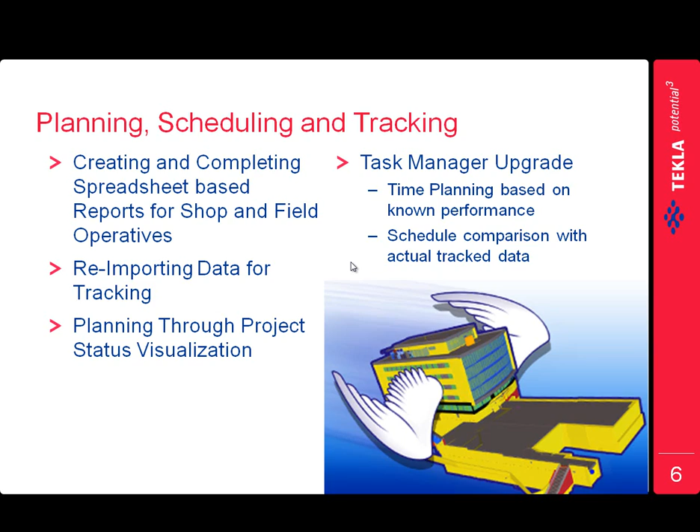So let's go ahead and dive right in. We'll go into the planning. So with the planning, I'm just going to go ahead and jump into the Tekla model. This is the same model that we've been using for all of the other episodes, if you will, of the Fabricator series. So what we did previously is we had it organized using the model organizer and things like that. So I'll go ahead and open up the model organizer just to take a look at some of the things that we did. We've done the cost coding and everything like that.

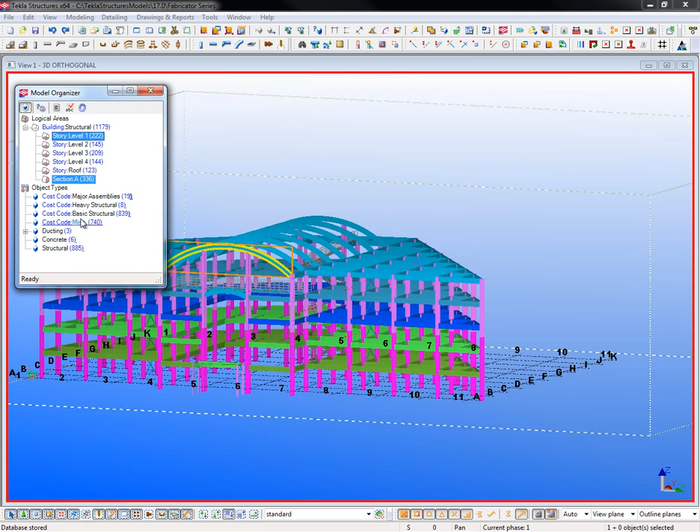So what I'll do is we want to plan some information basically about our phase 1. So what I can do is just click on this section A, which is how this is all broken down. If I click on control and select level 1, it'll filter all of that information out for me in a quick, rapid way.

So again, another advantage of using the model organizer as opposed to selection filters is that you can manipulate the information within this. And we could drill down even further if I wanted to just select the beams that were on level 1 in section A. So once I have that information selected, this is what we'll be working with.

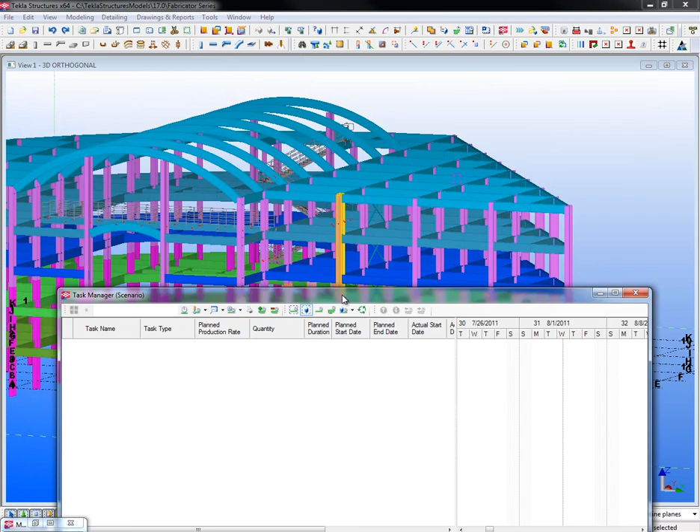So I'll go to Tools, down to Task Manager, and this will open up what is called the Task Manager. There's several buttons up here at the top which we'll go through and explain, but basically just general settings and similar features that are available in other Tekla tools. So the first thing that we'll do is just generate a task. And I can just call this the detailing task.

I'll go ahead and hit enter, and then under the detailing section, I can create a subtask for each of my phases. So I can do phase 1, phase 2, phase 3, etc., and then create another task for fabrication, and then subtasks broken down by phases, or however we want to have that broken down, and then for erection, or however you want to do that.

So what we have are different task types. But before I do that, I'll just go ahead and add information to this. So I'll just right click on this subtask, and I want to add the selected objects in the model to this. So I'll select add selected objects. And once I select pieces, I can then define a production rate. And this populates the quantity. So I have 86 pieces from the model that are going to be on that.

And based on this information, it gives me a planned duration, a planned start date, which is today, and obviously I can change that. And then based upon 2 pieces per hour, it's going to tell me that my planned end date is on August 10th. One other thing to notice there as well is that when Lee added the pieces to the task manager, the timeline in the Gantt chart actually grew as well. So you can see in a visual sense how long it's going to take to do that.

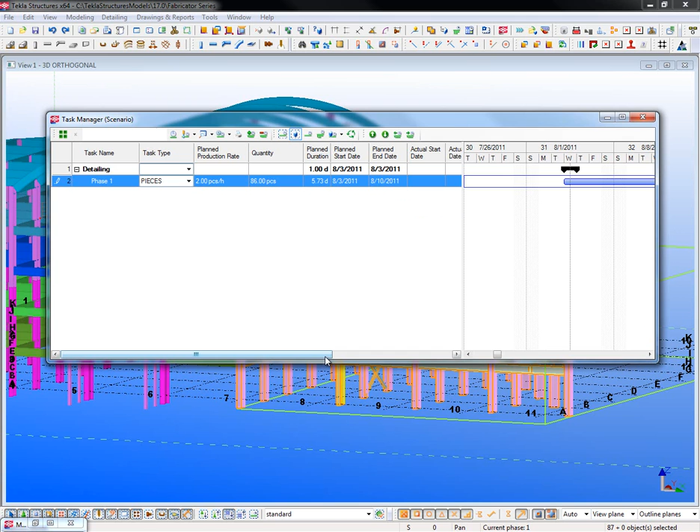The other thing with that Gantt chart, it shows colorized when there are objects selected with it, and it shows hollow when there's nothing in the model attached to it. So again, a visual representation of what's going on.

So as far as planning, we can come in here to my planned end date and say, based upon the schedule and things that are going on, I absolutely have to be done with detailing of phase 1 by the 8th instead of the 10th. So when I hit enter, the planned production rate is automatically going to increase to tell me how many pieces I have to detail per hour in order to meet this drop dead date of the 8th. And obviously my Gantt chart adjusts as well.

There are a couple of considerations when we're looking at this from a traditional detailing side, where you would be drawing things individually on a sheet, but of course that's not the case within Tekla. So you'd look at historically what you've been detailing stuff at, and by detailing I mean modeling, producing the drawings, cleaning the drawings. So that would be your entire per hour ratio here. You could break it down into modeling, drawing production and drawing editing if you wanted to be even more accurate. But we've taken an overview based on a rate of how long it would take to model, produce the drawing, clean the drawing, issue the object.

Yeah, and this also works in the reverse. So if I know that my team or myself can do eight pieces per hour, maybe they're real simple beams or something that's not as complex, this will also then update.

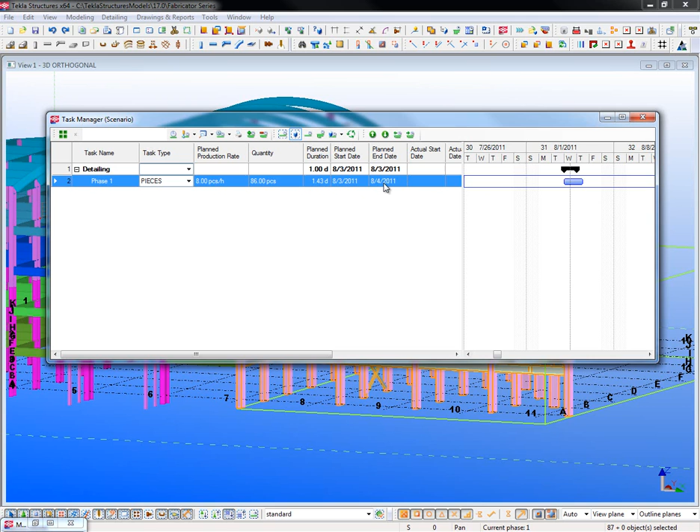So it'll say that my planned start date is going to be again on August 3rd, and it's going to take me 1.43 days at this rate to be completed by August 4th. So you can just do different scenarios and timelines and identify what your critical path is to be able to input this information into the actual model.

That one there's a procrastinator's dream, isn't it? Yeah. It means you don't have to start it until a day before it's due to be done. Yep, you're good to go.

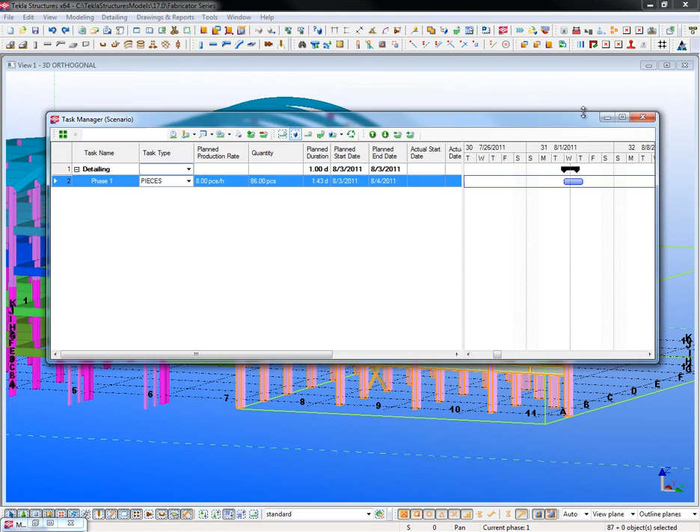So that's one thing that we can do. And then also within the model, let me shrink this down and move this down, we can actually also come in here. I'm selecting the assemblies and under project status, basically all of these UDAs, plan detailing start, plan detailing end, are linked and can be linked to the task manager. So I could highlight this and come in here and populate these values and have that brought into the task manager.

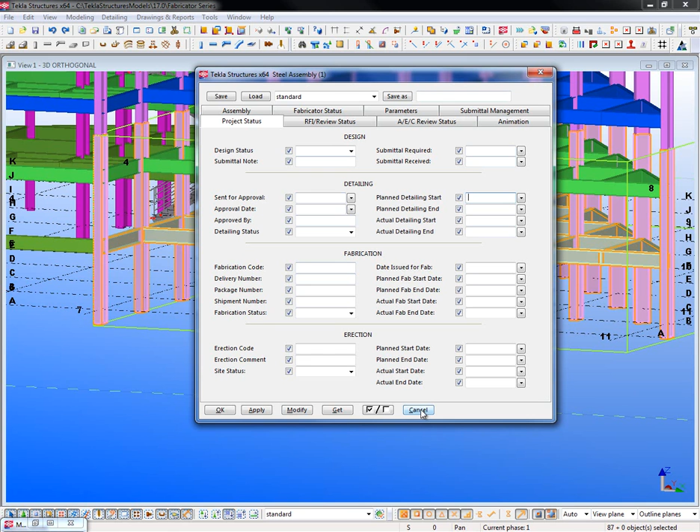So depending on how you want to do it, if you just want to do it by a lump sum or assign these UDAs to view it, you'll be able to do that. And we'll come back and talk more about this project status tab when we get further into this discussion. But just so you know, there are different ways that you can do things in different workflows. So just to do a quick review of planning the schedule, you can either do the UDAs or you can just do it straight into the task manager.

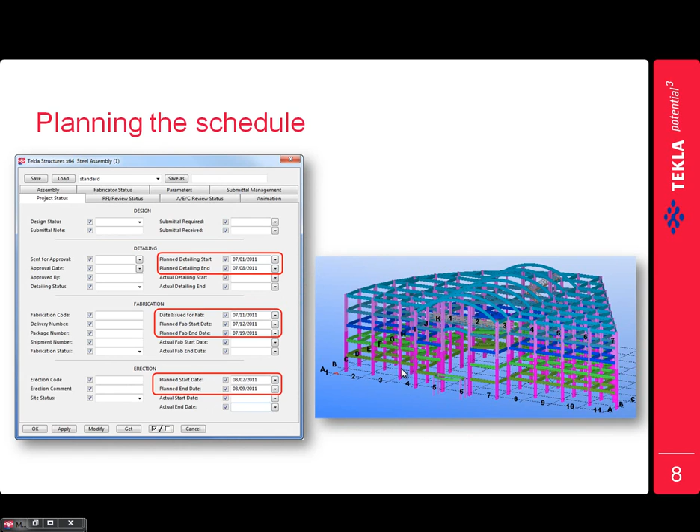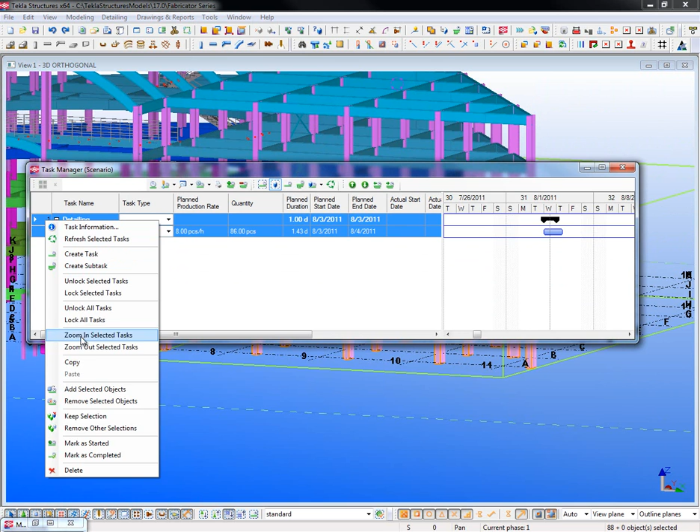Alright, next we're going to take a look at scheduling and some things that you can do with that. So I'll jump right back into the model here that we're working with. I already got my task manager open. So we can do it this way, but one thing that I want to show, let me just delete this. We can come back and play with that later. What I'm going to do now is basically create a scenario which will allow me to import a schedule from the general contractor or whoever.

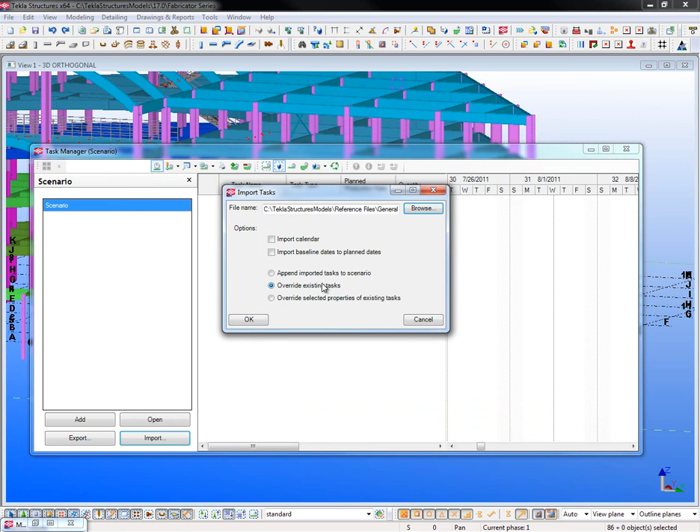And these files can basically just be imported from Microsoft Project or Primavera. So if there's already a schedule going on with the actual project, we can bring that in. So I'll just go ahead and select the general schedule, and I can override existing tasks if I already have them in there, or these different options. But what this will do when I hit OK is bring in all of the information and the breakdown that they already have for this actual project.

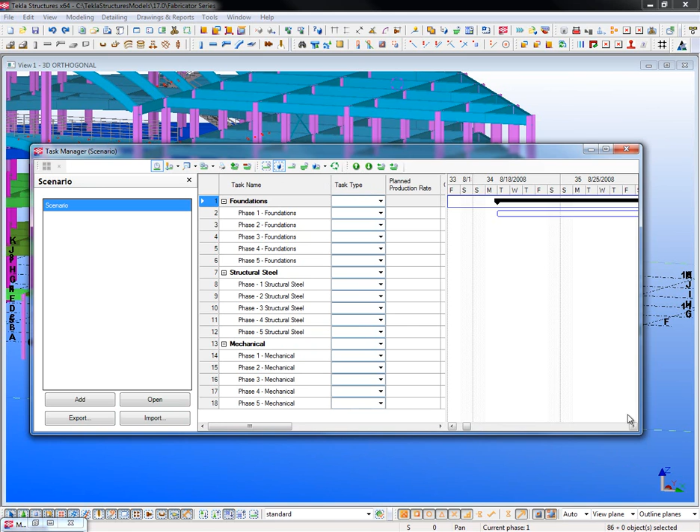So if I look at the different sections that they have, I can see the foundations, the structural, they have it broken down to mechanical, and it can be even further than that. So if I scroll over, as Ian mentioned, these are the actual timelines, but there's nothing in them, so they're blank. So what I can do is highlight my phase 1 and link my objects to that, so that I can then compare.

Say, okay, their schedule says I need to be done by this day. When I link my actual objects to it based on my production rate or what I think I can do, then I get a good idea of whether I should bring a sleeping bag and pillow to work to camp out to meet their schedule, or if I'm on track. So it'll give you a good understanding of how the objects in the model relate apples to apples back to their schedule. So it's a huge thing that you can do.

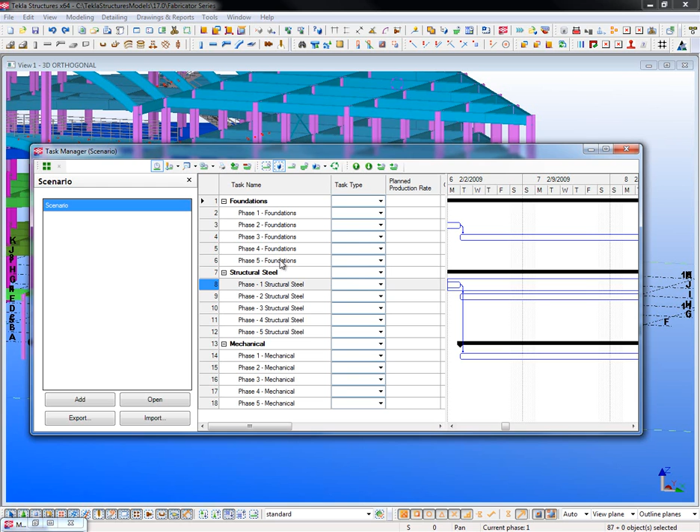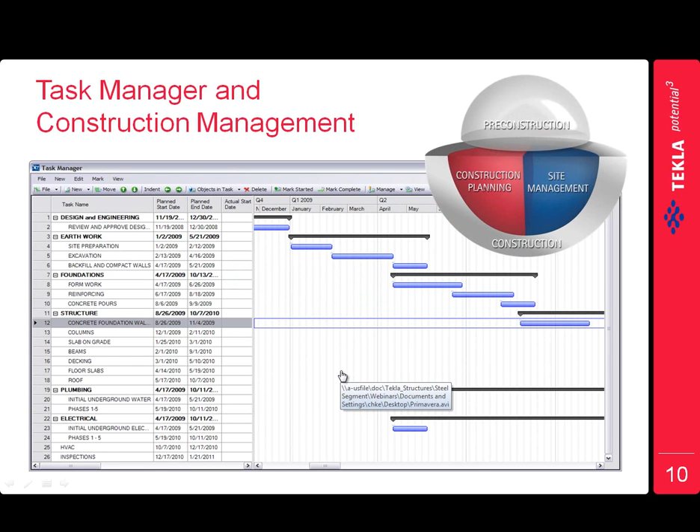So let's take a quick look at that back here on the PowerPoint. Being able to do all the construction planning, the site management, or even pre-construction, and then have it broken down piece by piece with objects linked in the model gives you a huge advantage on the actual project. Another portion of that is when you're working with the GC, if you can adopt his schedule, you're also saying to him, if you send me your schedule, I'll make sure that I fit it because I've got tools that can help me work with you. It's another selling point for your business over your competitors.

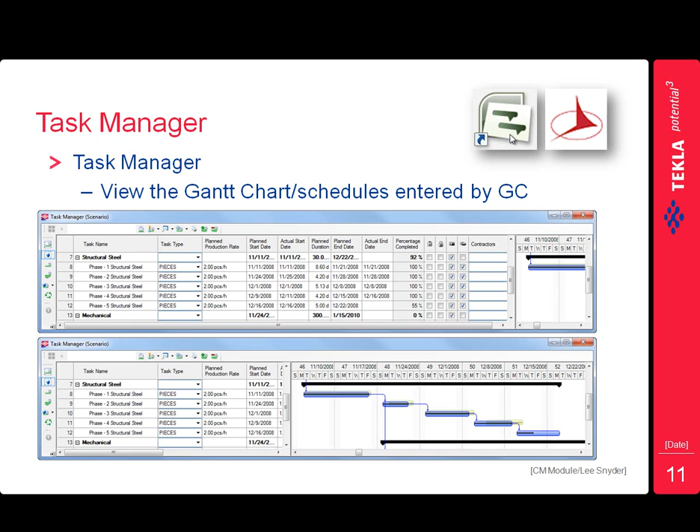Yeah, and again, just to mention, you can bring these in from Microsoft Project or from Primavera to be able to link those, and basically it's just in an XML format.

So on to tracking. We'll spend a little bit of time doing our planning to see how it's going to go. We can build our schedule within the task manager, but then with the tracking, this is where we get into the nuts and bolts, or the meat and potatoes, where we start to bring in actual dates and information from the general contractor, from the fabricator, so that we can compare our planned dates with the actual things that are happening in the project.

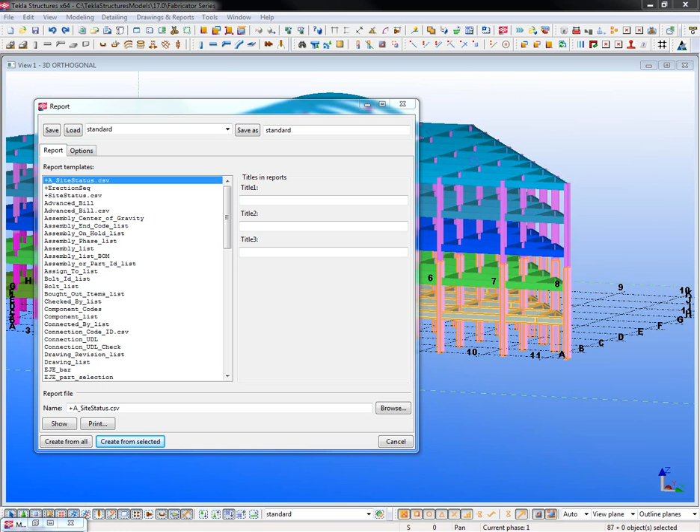So back into Tekla, what we'll do here is a feature that's called an attribute import that has a couple different steps with it. So with this information highlighted in the model, what I'm going to do is come up here and generate a report. I'll just create this from selected, and let me bring this on over here. And Lee's creating this report using Microsoft Excel.

We're kind of assuming at the moment that perhaps the fabricator or anybody else you're dealing with doesn't have an MIS or MRP system like FabTrol, FabSuite or any one of those. So this can be done with Excel spreadsheets, or it can be done through some of the tracking tools that are available in other systems that we link to as well.

And so what this will do is bring in the individual ID of the piece. So you'll notice here that I have several C29s, but they all have an individual ID number. So the dates or the information recorded about that individual piece, not just the overall assembly with the quantity of 5 or whatever, is going to be written to that piece.

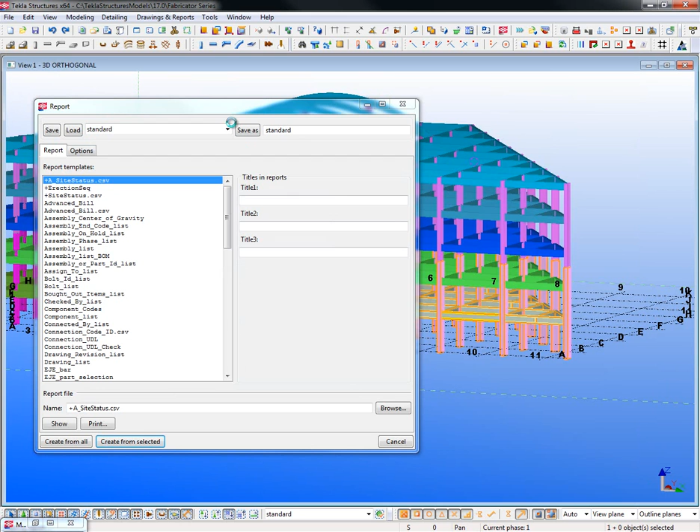So here I can do the shop issue, when it was issued for shop, or when the detailing was complete, when the fabrication was actually started, when the fabrication was completed, when erection actually began, and when the erection was complete. And these are just a few that we've selected. Let me show you here. If we pull up the actual UDAs on this piece under project status, these are just some of the UDAs that I brought in.

Obviously it should go without saying that you can customize something like this any way that you want, for what you want to track or don't want to track, or what's important or crucial for you. So with this workflow, you would send this to the detailer, and then they could populate their dates here, and even times if you want to get that specific. Send one to the fabricator and then one to the erector, because somebody's tracking this information already.

So if you can just get it in a format that agrees with Tekla, then you can bring it back into the model. And the neat thing about this too is that you could send out 3 different copies and have the detailer fill in his information and everything else would be blank. Same for the fabricator. When you import those back in, it's not going to override the information of the other trade, as long as these are left blank. So as long as each trade stays in their sandbox, you're going to be okay.

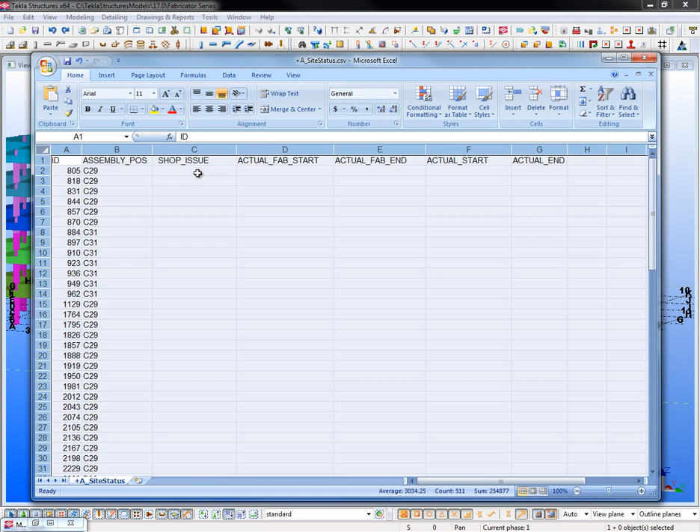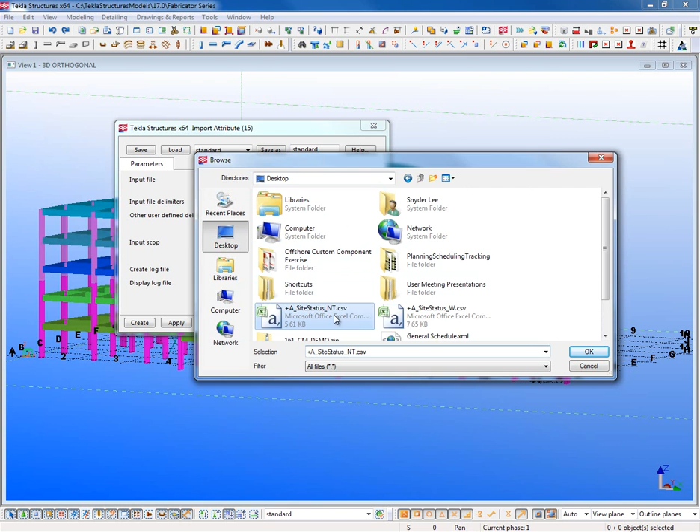So within the Tekla model, I already have populated this report with specific dates. So over here in my model, I'll go up to File, down to Import, and select Attributes. Then within this dialog box, like I mentioned before, I have a pre-populated report that has the dates, and you could include the times of when things were generated. It's just a comma delimited CSV format. I can choose whether I want to show the log report, which I will, just so I can see what it looks like.

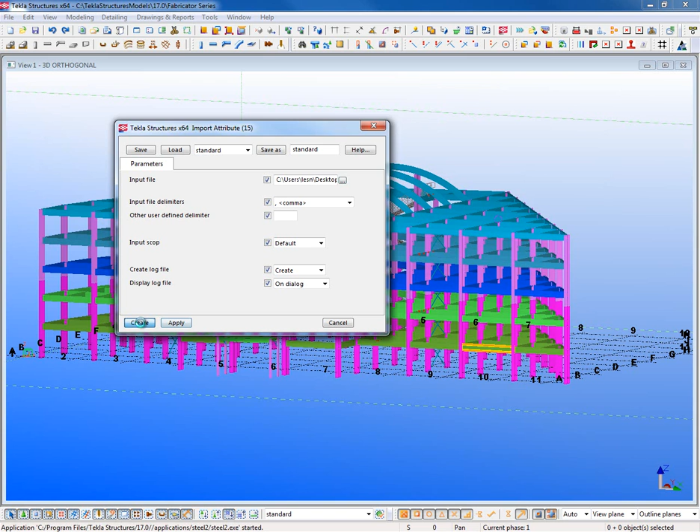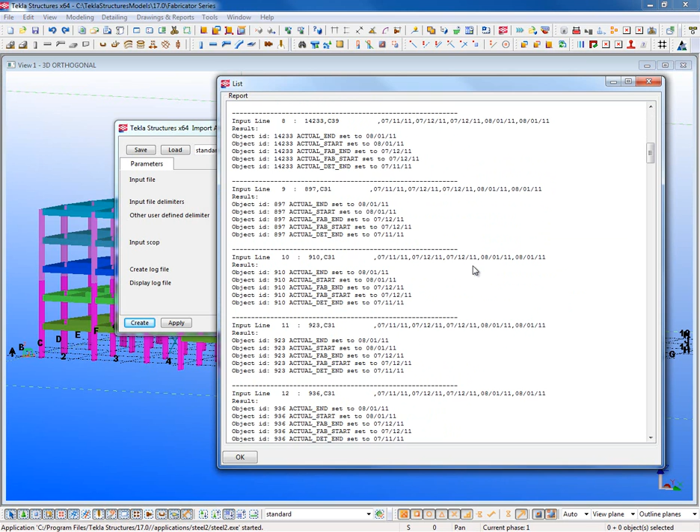When I hit create, it's going to take the ID numbers from the Excel report, find those IDs within Tekla, and then map all of these properties to those individual pieces. If there were any import issues, it would show up on this report, so I can scroll down to see everything that was brought in.

If I just double click on one of these to see where these are brought into the UDAs, it will pull up the properties, and I can come over here to project status. You can see it's populated the actual detailing, the fab start and end dates, and this one doesn't have any erection information, so some has been erected to this point, some hasn't.

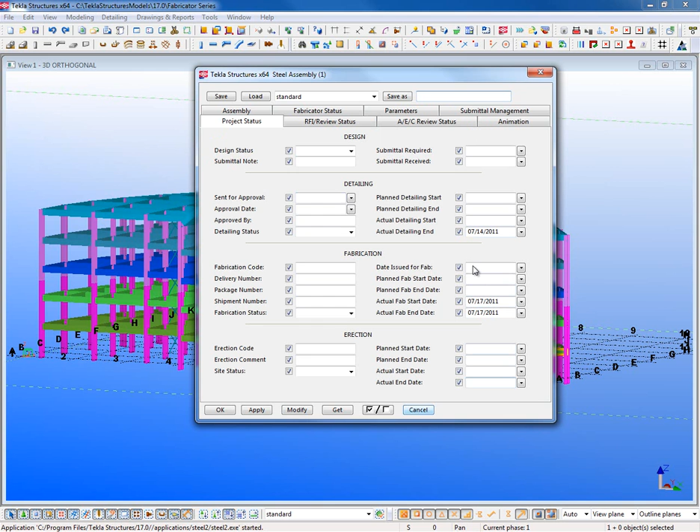It's worth mentioning that this is data people are recording anyway. The guy loading the trucks is recording what he puts on the trucks, so this is information he should just be sharing back to the guy using the model or the project manager on the job.

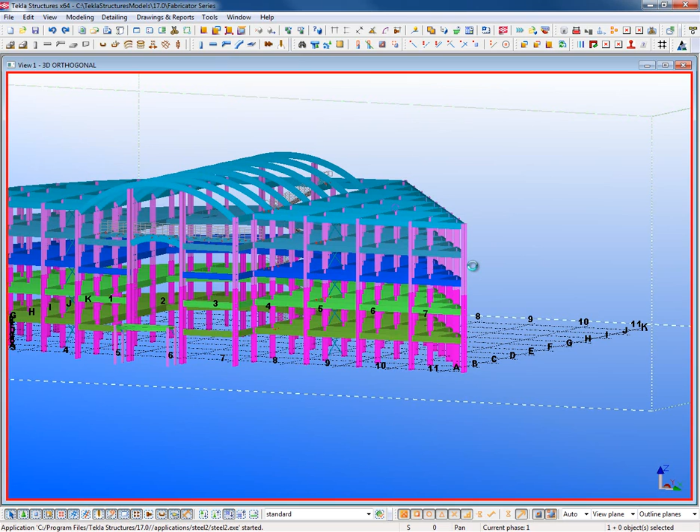The other thing is it doesn't have to be an Excel file, though we've mentioned that before. It can be any MIS or MRP system that you might already be using.

Taking a look at the 4D or our project status visualization, I'm going to load this steel tracking. This review date can be set to any time, past, present, or future, to see where the project is and what it's doing. So if I have information in the model, I can look at this at any time throughout.

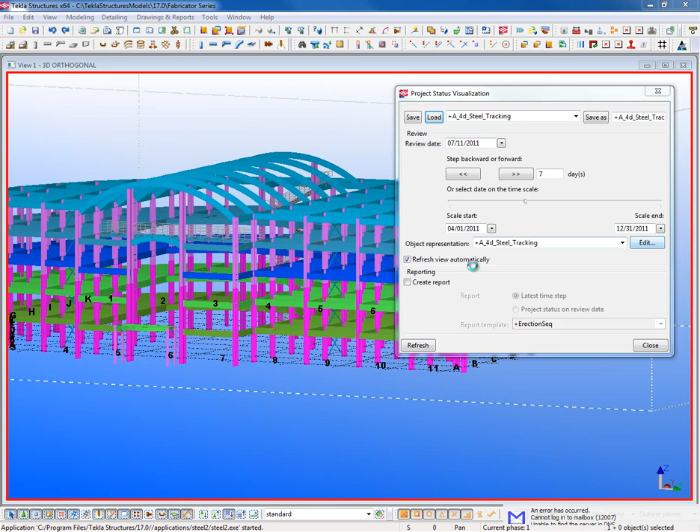If I click on edit, I've set up object representation rules that tell me what the colors mean. When something has been erected, it'll be colorized in green. For the fabrication, it'll be colorized in blue. And red means it has actually been detailed.

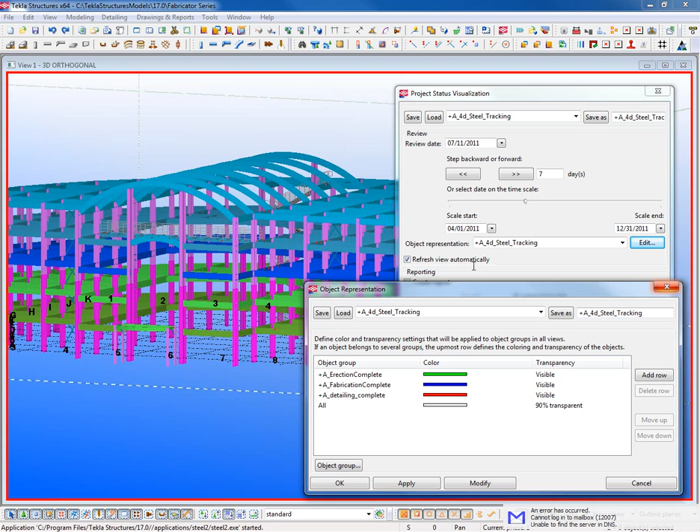So I can go in and colorize my model and take a look at a specific day to see what's going on. On the 11th, we did our first detailing submittal to fabrication, and they began fabricating that day.

Some of them were completed, so when I refresh, most of the model will be red, meaning the detailing is complete, but some of these will also show up as blue because they began fabricating on that day. I'll just let this colorize the model.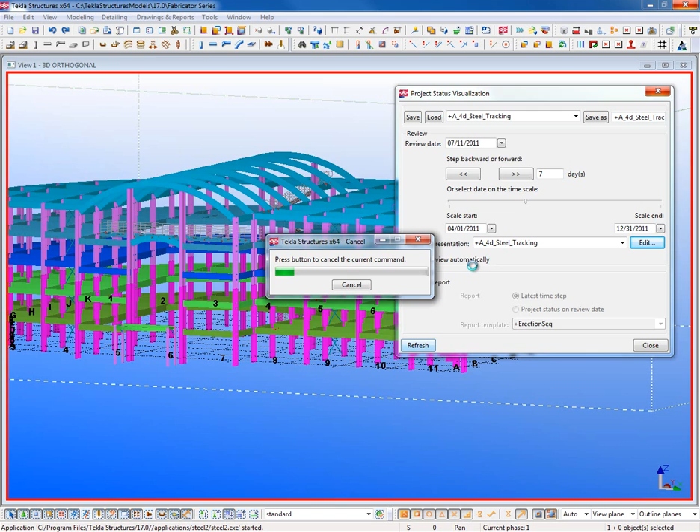There we go. So we can see, as I mentioned, everything in red has been detailed. The ones in blue have also been detailed, but they're also at a point in time where they've actually been fabricated. Let's go ahead and take a look back here.

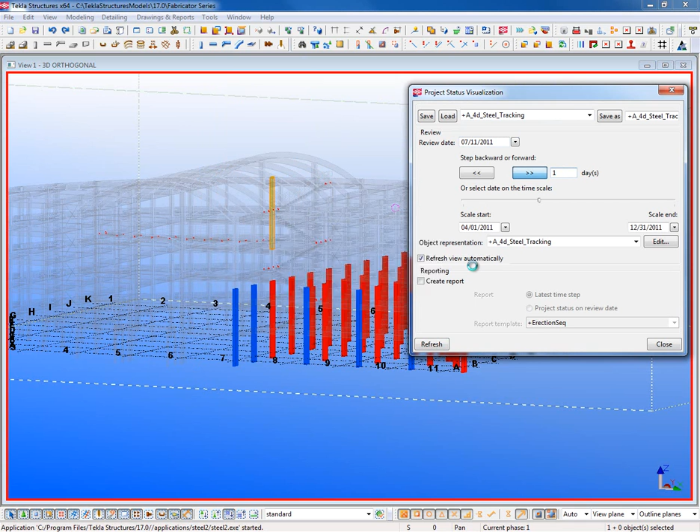I can either click on this and select the date I want to see, just to see that exact day, or I can step this through by 7 days or by 1 day. When I click on this button, it will go through and colorize the model based on these other days. So now these columns over here have also been fabricated. I can just get a quick look at the project however I want to view this.

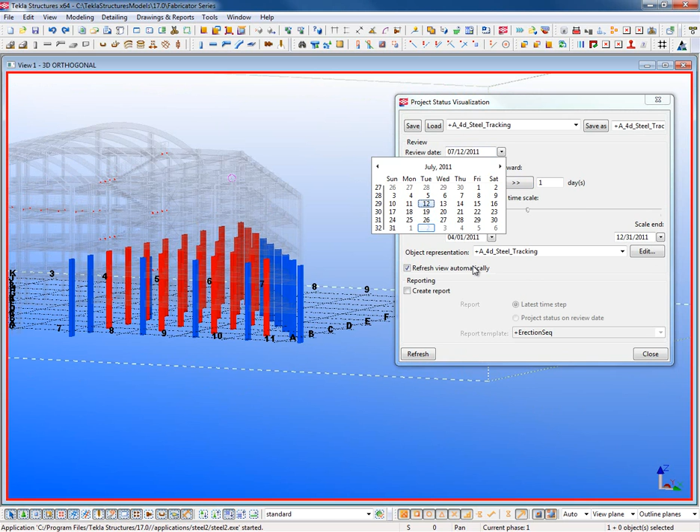If I want to jump to a specific time, we began erecting some of this on the 1st of August. So if I look at the 2nd of August and click refresh, it will colorize the model based upon that information. So right here I can see pretty much everything's been fabricated, and everything in green has begun to be erected.

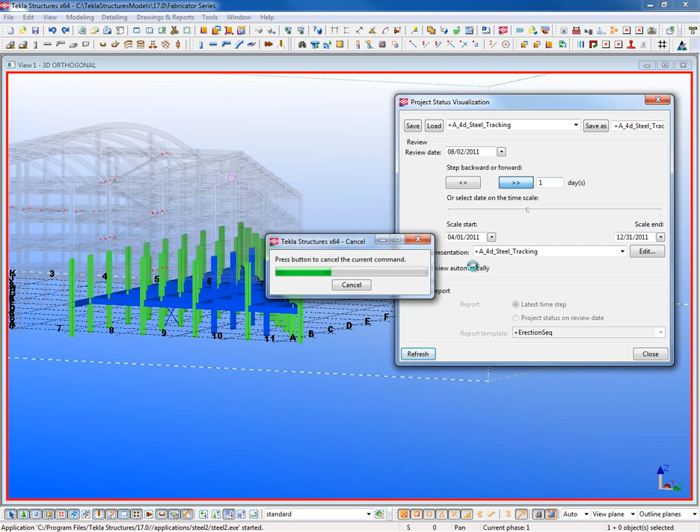If I step this forward by a day, remember that you can share this colorized model using tools like Tekla BIMsight or the publish to web function within Tekla as well, so you can give good visual representations of your status to all of your contract partners.

It colorized the other items that have been erected on that day, so that brings us up to August 3rd, which is today. I can get another updated list tomorrow or at the end of the week to be able to see exactly where the project was at any given time.

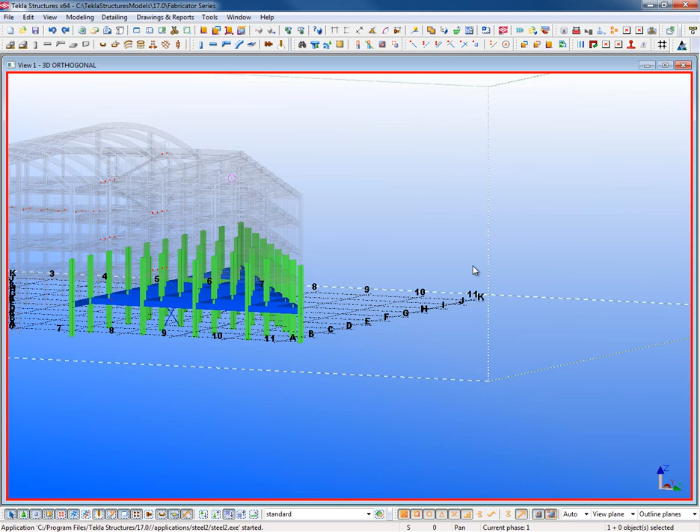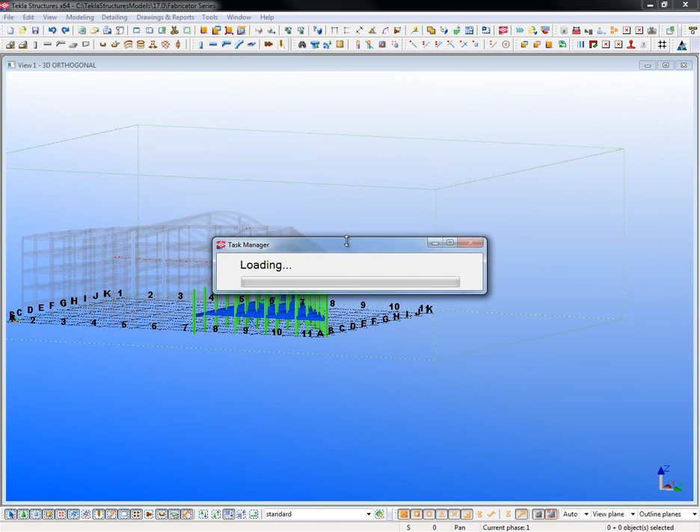So that's that for the project status visualization. Let's take a look at the task manager and see how these attributes that were imported, these UDAs that we populated from the CSV file, are associated with the task manager. I'll open it and load it, and then we can build our different tasks.

Based on detailing, fabrication, and erection, I could use this if I wanted, but just to create one from scratch I'll go ahead and do that. So let me create a task, and we'll do this again for detailing, then create a subtask just by clicking this, or I could right click on it. Let's just do phase 1, and I'll set it to be detailing.

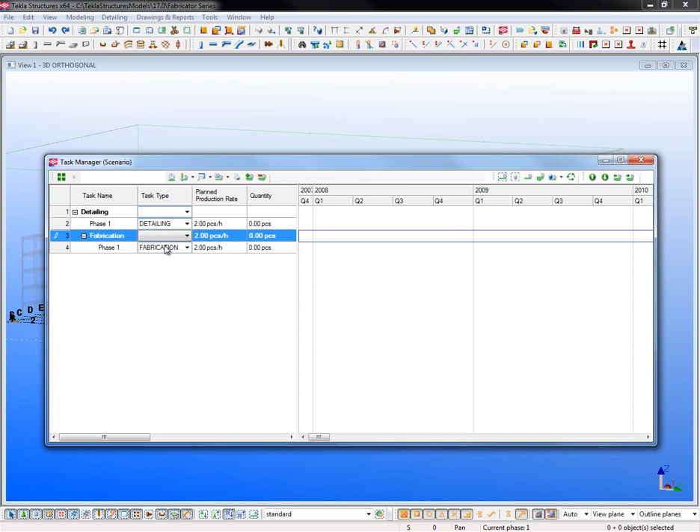So let's create another task for fabrication, and a subtask of that, and this can be phase 1, and I'll change this to be fabrication, and this should just be blank. One more time for the erection, and again phase 1, I'll link this to erection.

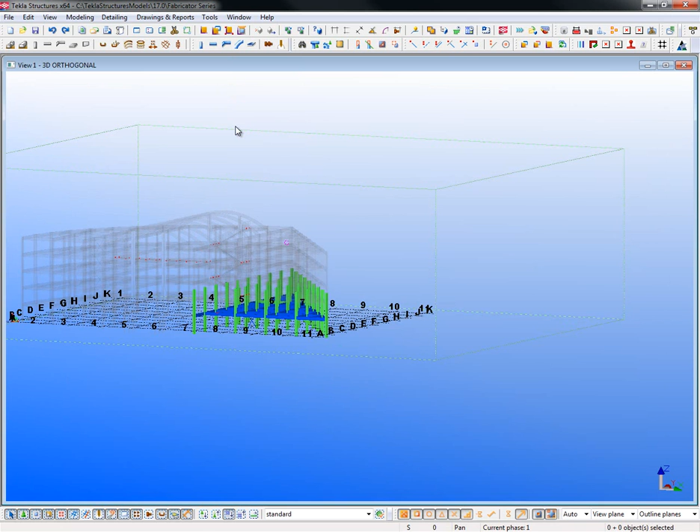So we have that. The next thing we need to do is go back and get our model organizer so that we can highlight phase 1 in the model, just as we did, so that we're getting the same objects that we created our attribute report from. So it'll be level 1, and then control and click on section A. We want to link those objects to our detailing, to our fabrication, and also to our erection.

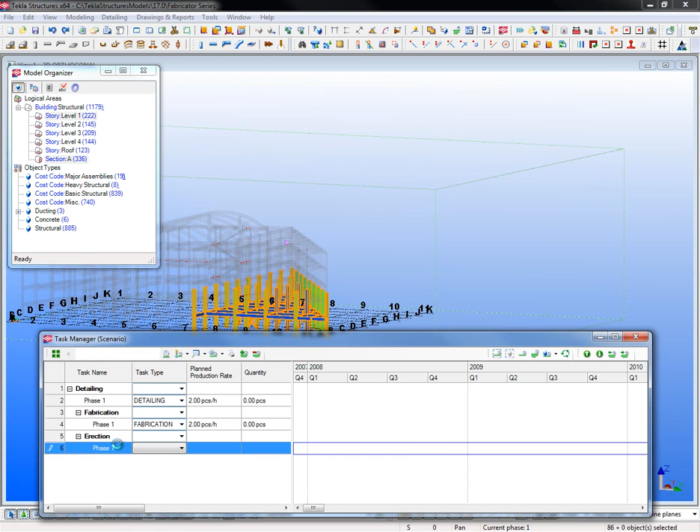Okay, so now we have the objects actually linked to the individual phases - the detailing phase 1, the fabrication phase 1, and the erection phase 1. So what we can do is take a look at several different things. If I right click on one of these phases and look at the task information, it'll show me all of the values of the UDAs that I have and all sorts of different things.

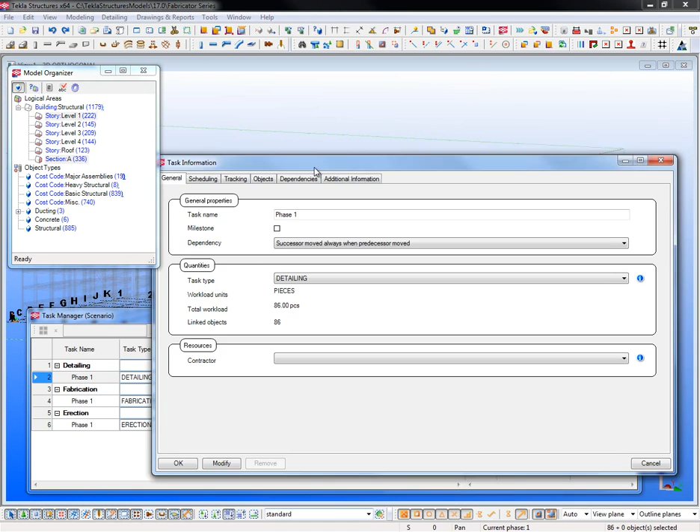So here on the general tab, this will just say what the phase is, that we're detailing, where our workload is by pieces. We could also do it by weight. So if you knew that you could fab a certain amount of weight, you could track it by that as well.

For the scheduling, here it gives us all this information with the planned production rate at 2 pieces per hour, and it also shows me the percentage that I have complete. I've completed all of the detailing, so that's why it's marked at 100%.

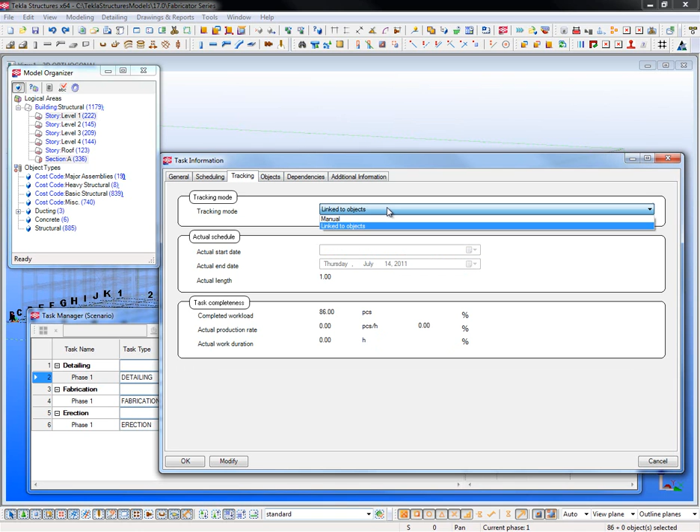Over on the tracking, we're tracking this by linked objects. You could override that and just do manual and then plug in the information if you wanted to as well. But over here on the objects, we can see for my actual end date, this is when the detailing was actually complete.

So if I take a look at that, by clicking on any one of these tabs, it'll order it. Here's the 7/11, my first submittal, and then my other submittal that went out on 7/14. You can see the grid location, different marks, and set up those settings for whether you want to see more or less about the actual pieces.

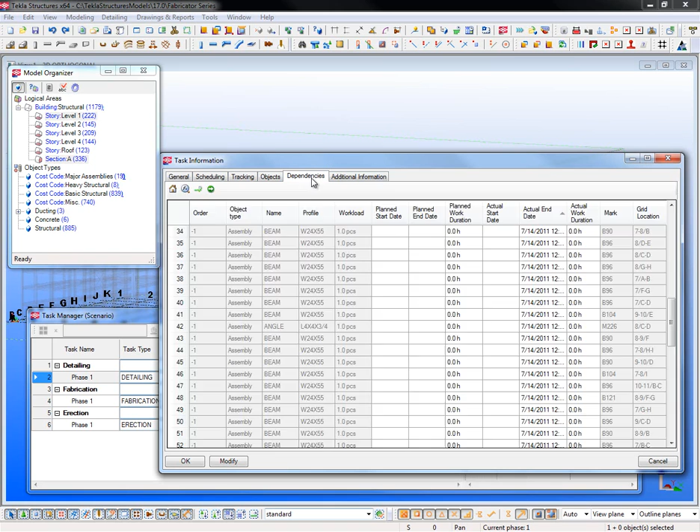We can also create dependencies. So if you're detailing phase 1, obviously you won't be able to fabricate it until the detailing is complete. So you can create a dependency on that and be able to see all this information here.

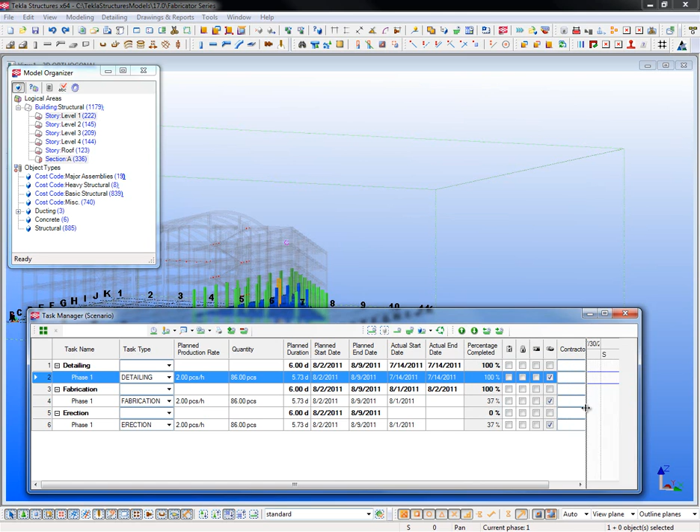Okay, so let's go ahead and expand this out to take a look. What this is saying is that based upon the UDA information that I brought in, 100% of the detailing is complete, 100% of the fabrication is complete, and 37% would be complete with the actual erection information. So if I slide this over, we can take a look.

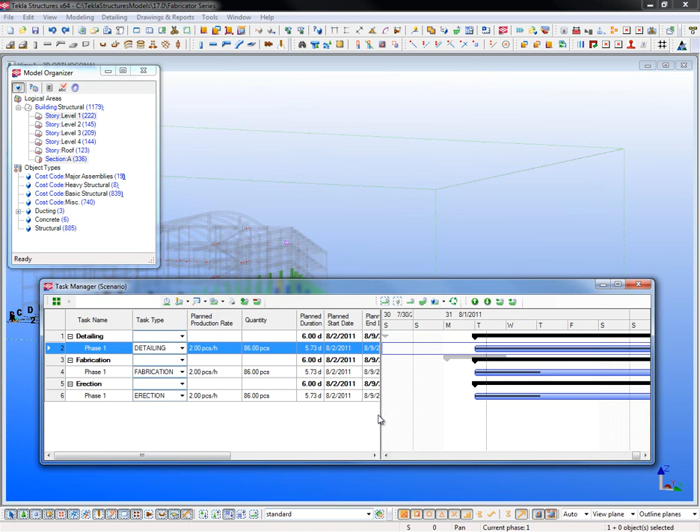Let me refresh this one. There we go, so I just had to refresh that.

So 100% of the fabrication is complete, which you can see here by the lines going through. If I just drag this over, the blue line basically shows me the percentage that's complete.

So 37% is complete, and this is really important too, because as the UDAs are tagged, you can say, okay, I've completed 37%, but I have 4 weeks total to do the project and I'm already 2 weeks into it. So you can know that you're not at 50%, and adjust accordingly.

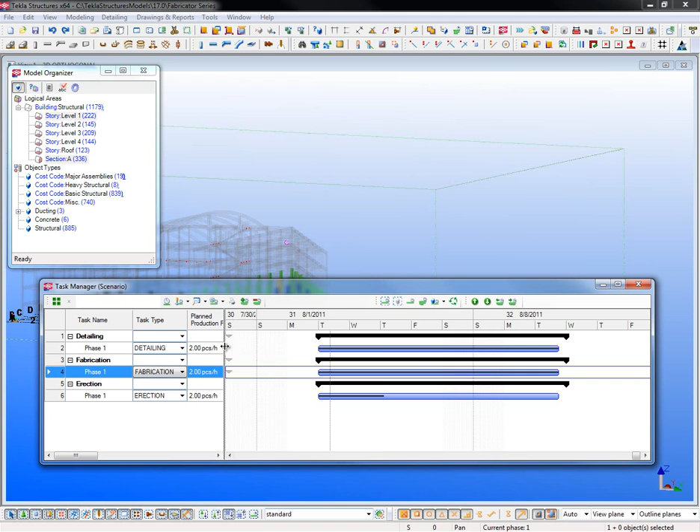It's a real handy tool to look at your schedules, and as I mentioned, you could create dependencies on these. We had, as we submitted some of the detailing, the fabrication began the first day. So however you want to use and adjust that.

Yeah, it looks good. I think the key thing is examining your burn rate, as Lee says, so you can see if you're going to go over time on the project and perhaps even report that early to the GC so he can make changes accordingly. So again, another benefit that you can work with your project partners, offering tools that your competitors cannot.

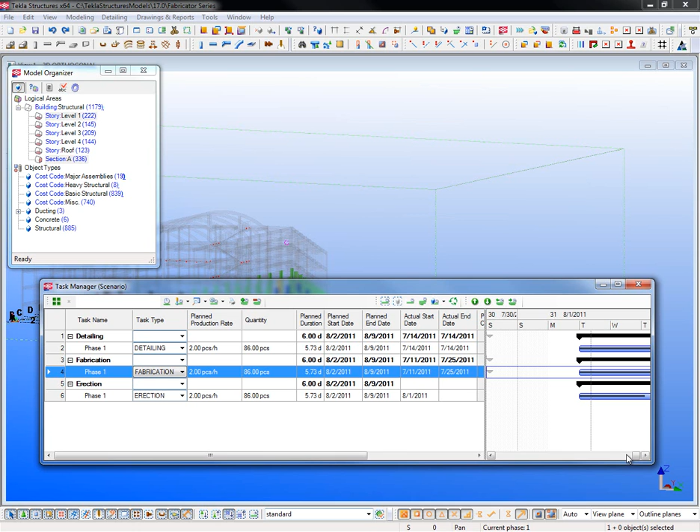Okay, so back to the PowerPoint, we'll do a quick review. For the attribute import, as we selected the items in the model, generated the report from those pieces, the individual trades - detailer, fabricator, erector, whatever - input that information, and that's just using a comma delimited format to attribute import back into the model.

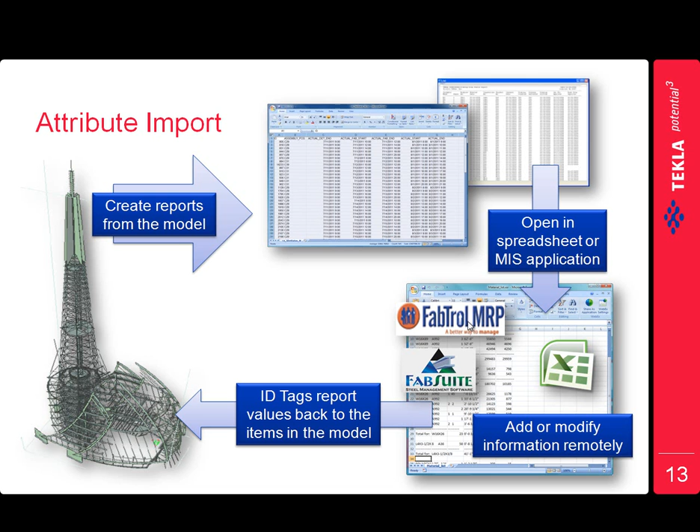We also have links with FabTrol and FabSuite where you can track some of this seamlessly using some of their different reports. And then once the information is back into the model, we have the project status visualization, which allows us to view the model based upon the different aspects that are going on.

So for this one, you could do checked, approved, fabricated, and erected, or any of those UDAs that you want to track and report on.

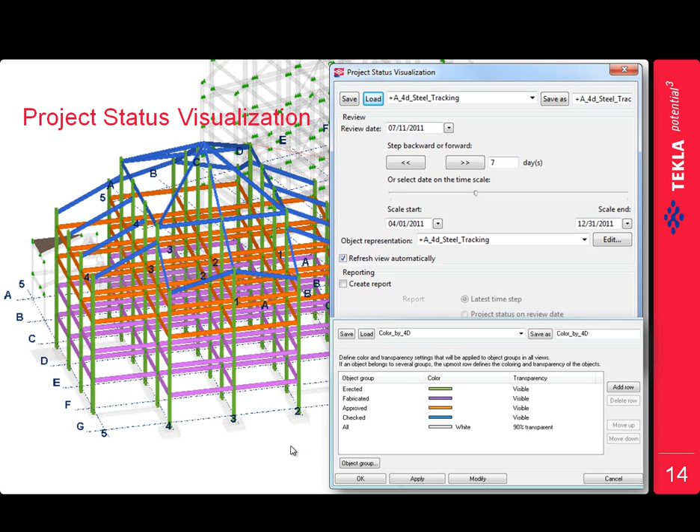So to do a complete review of everything we've talked about: going through this workflow, enter in the plan dates to the actual objects in the model just by plugging in information to the actual UDAs. Then you take that section you're working on - phase 1, phase 2, the lot, the sequence, or however you have it set up - and link those objects to the task manager.

And with that, if you have the GC schedule or the overall schedule of the project, you'll be able to verify the feasibility of that schedule to see how much work you're going to have to put in, or how off the schedule is, so you can make necessary adjustments if possible.

Then once you have that, you can generate a report or MIS data from Tekla, get that information populated, and bring that back in so you have actual updating information of how the project is progressing. And then you can share that information with a colorized model either through Tekla BIMsight or basically just generating a web page so people can view that. Again, both of those options are free for people to view at any time.

And then also, just as we showed, you can see the burn rate or the progress within the task manager. Yeah, it looks good, Lee.

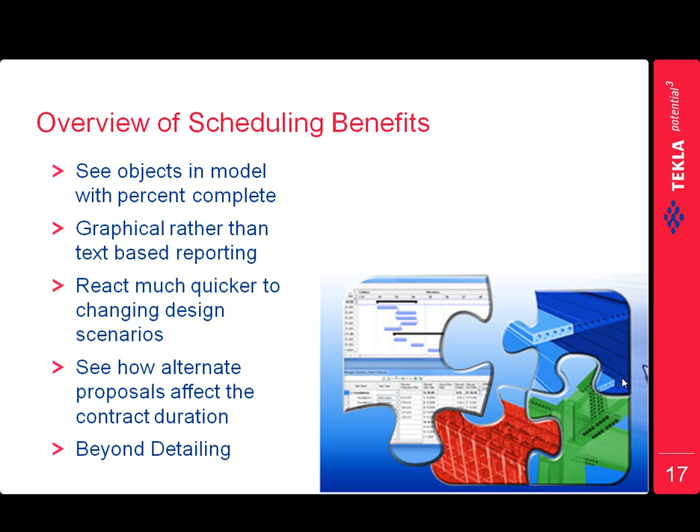All of this, in summation, is what we're calling beyond detailing. We'll talk about it in a minute, but we're doing a session at the user group meeting this month on all the extra tools that you can sell to GCs, to engineers, to owners, to all of your project partners that really differentiate your business over and above just a simple set of detailed drawings, no matter how beautiful those detailed drawings might be. So it's all part of using Tekla to develop your business.